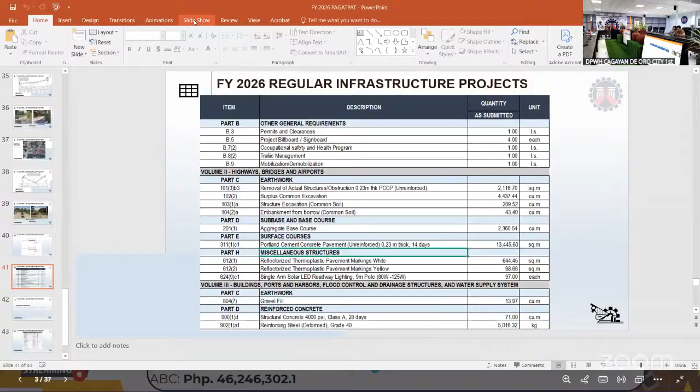So I'll continue. Gravel fill, 13.97 cubic meter. Structural concrete, 4,000 PSI, class A, 28 days, 71 cubic meter. Reinforcing steel deformed, grade 40, 5,016.32 kilogram. And in permits and clearances, you have the excavation permit as per ordinance.

So this is the minimum equipment requirement to be used. Two-way radio, 2 owned, barricade flasher, 10 owned, trailer for equipments, 1 leased, concrete vibrator, 2 owned, concrete screeder, 1 owned.

Concrete saw, 1 owned, mechanized joint sealer, 1 owned, plate compactor, 1 leased, vibrator roller, 1 leased, motorized road grader, 1 leased, dump truck, 2 leased, transit mixer, 1 leased, concrete batch plant, 1 leased, chainsaw, 1 leased, boom truck.

1 leased, backhoe, pavement breaker, 1 leased, water truck, pump all models, 1 leased, bulldozer, 1 leased, payloader, 1 leased, backhoe, 1 leased, bar cutter, single phase, 1 owned, bar bender, 3 phase, 1 owned, 1 bagger mixer, 1 owned.

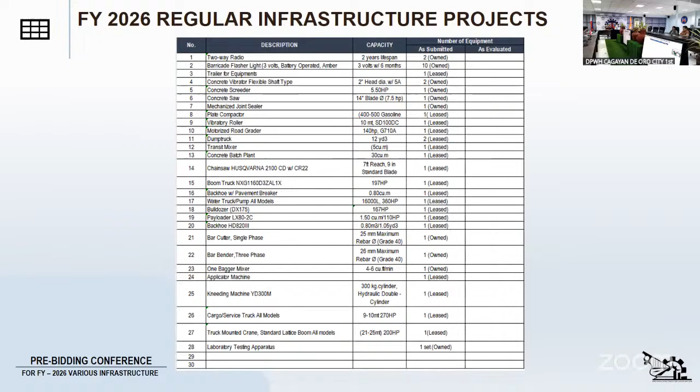And that's all for this project. Thank you. Any question?

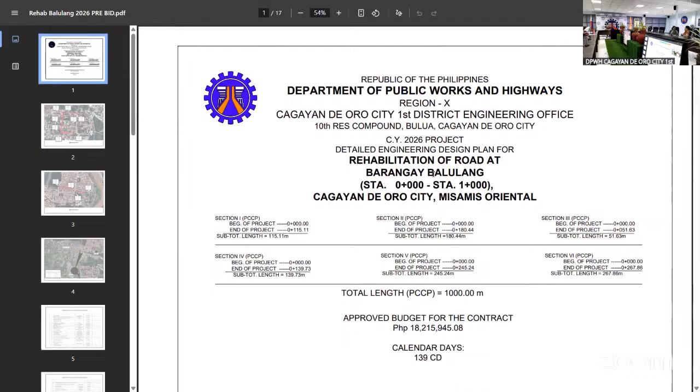Hello, good afternoon, for rehabilitation of road at Barangay Balulang, Station 0 to Station 1000, Cagayan de Oro City, Misamis Oriental with calendar days of 139 and approved budget for contract of 18,215,945.08. This project has a total length of 1,000 meters, divided into 6 sections.

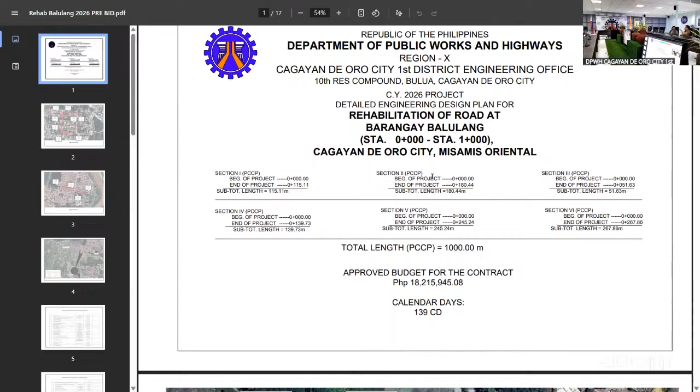Section 1 with 115.11 meters, Section 2 of 180.44, Section 3 51.63, Section 4 139.73, Section 5 245.24, and Section 6 with 267.86.

As shown here are Sections 1, 2, 3, and 4 presented by the red line. Section 1 here at Nangka Street, Section 2 at the 10th Street, Section 3 at 2nd Street, and 9th Street for Section 4.

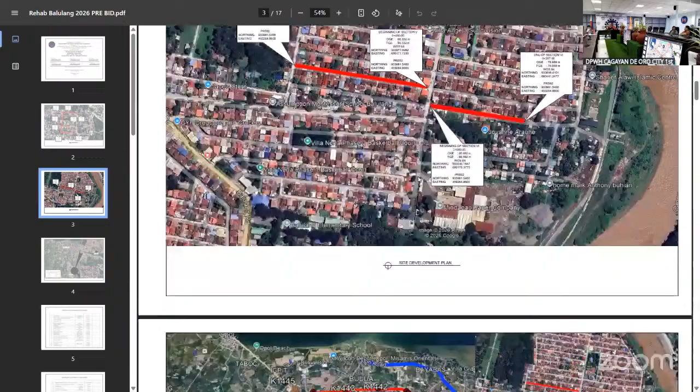And for Section 5 and 6, as shown here, on the left side is Section 5 and Section 6 on the right side. Here's the general area of the 2 divided locations for Section 1 to 4 and Section 5 to 6, shown here.

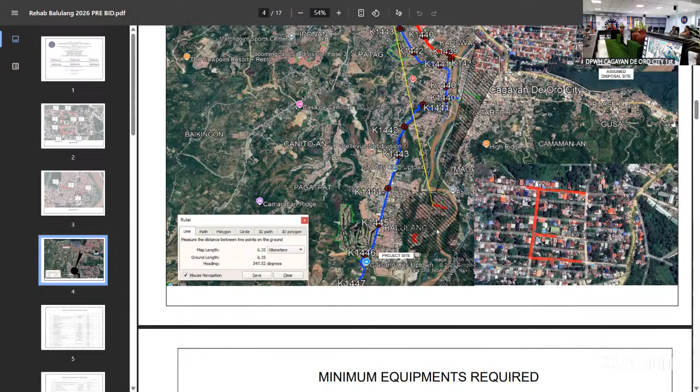For the minimum equipment required for the project: 2-way radio, 3 owned; barricade flasher light, 10 owned; trailer for equipment, 1 lease; trailer for minor tools, 1 lease; backhoe with pavement breaker, 1 lease; payloader, 2 lease; dump truck, 2 lease; concrete saw, 1 lease; bulldozer, 1 lease; backhoe, 1 lease; motorized road grader, 1 lease; vibratory roller, 1 lease.

Water truck/pump, 1 lease; concrete vibrator, 2 owned; concrete screeder, 1 owned; bar cutter, 1 owned; mechanized joint sealer, 1 lease; transit mixer, 4 lease; concrete batch plant, 1 lease.

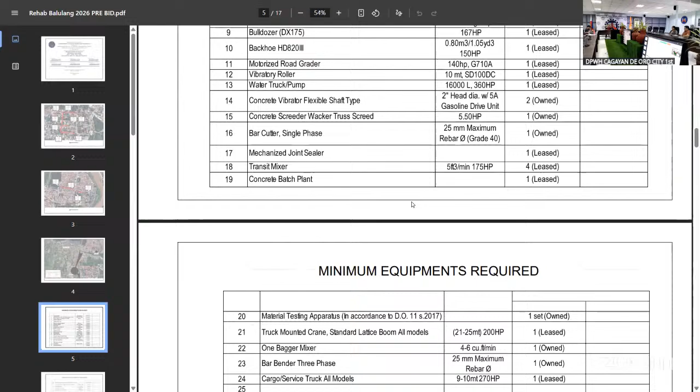Material testing apparatus in accordance with D.O. 11 series of 2017, one set owned. Truck mounted crane, standard lattice boom, all models, one lease. One bagger mixer, one owned. Bar bender, one owned. And cargo/service truck, all models, one lease.

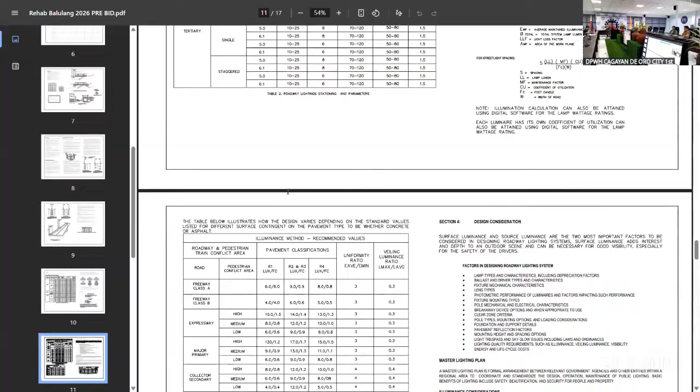Oh, shucks. Hmm. Okay. Follow mo lang. Hindi, ito, Excel mo. Itong sa marami mo dali. Wala ito. Hirap na pa rin plan, di ba? Nagkataon ako pa rin. Second.

Continue, sorry for the technical difficulties. Let's skip on to the typical roadway sections for the project. I'm gonna show the summary of quantities after this.

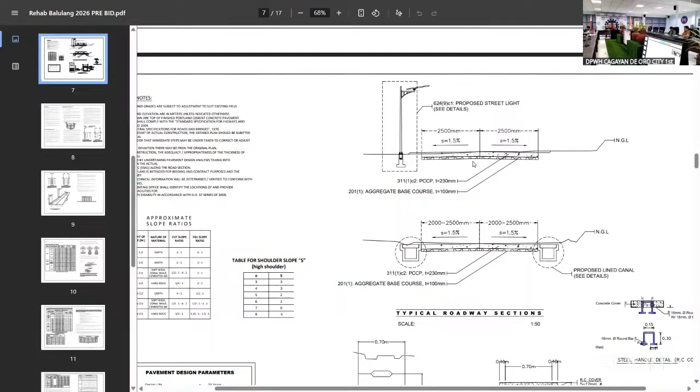For the typical roadway sections for the project, we have proposed street light. For the PCCP, we have 230 mm thickness, and the width on one of the sections is 2,500 mm per lane, or 2.5 meters. For the other typical roadway sections, depending on the section, it ranges from 2 meters to 2.5 meters per lane. We have proposed line canal, and here are the details for that. And here are the typical street lighting details.

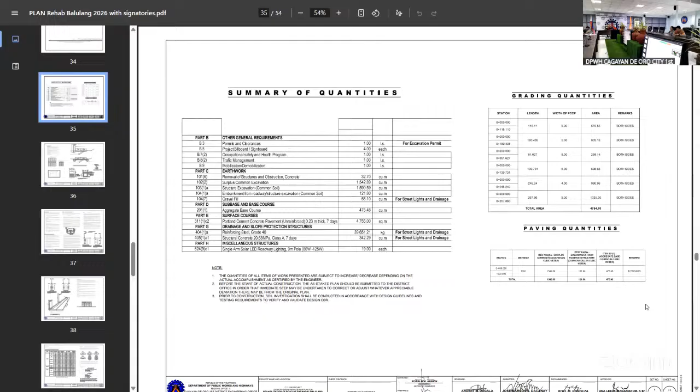So now let's proceed to project number 5, rehabilitation of road at Barangay Canitoan, Station 0 plus 000 to Station 2 plus 000, Cagayan de Oro City, Misamis Oriental. The details of this project will be discussed again by the General Manager, Marks.

Good afternoon again. For rehabilitation of road at Barangay Canitoan, with approved budget for the contract of 36,998,409.31 and calendar days of 350. For this project, we have 3 sections with a total length of 2,000 meters.

Section 1 with 1,916.75 meters, and for section 3, we have 83.25 meters for PCCP, with a total of 2,000 meters. Other than section 2 for the drainage, which is 360 meters.

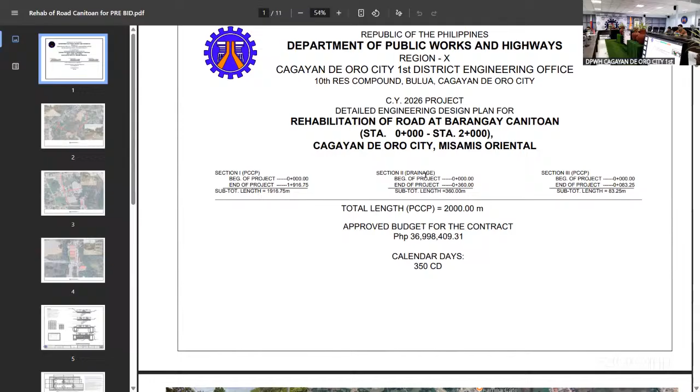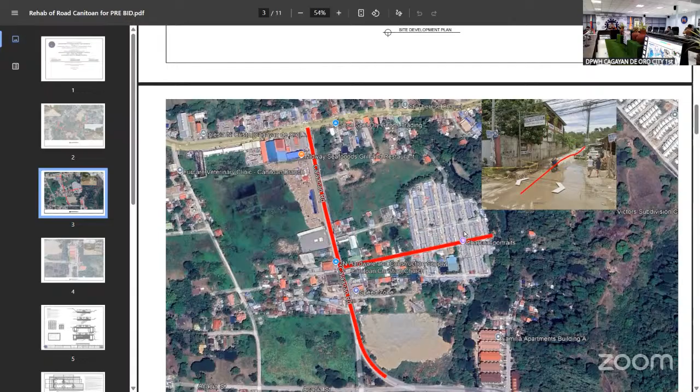So for this project shown here at Canitoan, represented by the red line along this alignment, is the rehabilitation for the road for Canitoan. Also representing the red line is where the drainage will be placed, which I've mentioned before, which is 360 meters. And for the other section for the PCCP, represented by the green line, near the Familia Apartments Building.

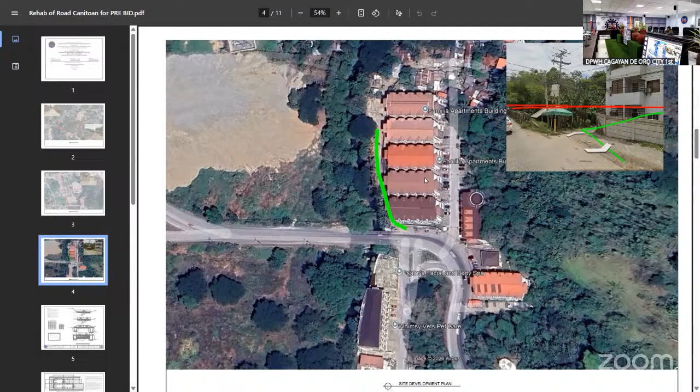And here are the typical roadway sections for our project. For the rehabilitation of the roadway section, the road has an existing 2.5 to 3.05 meters per lane. The new lane or new width after rehab is 3.05 meters. So the new PCCP that's gonna be put there is 280 mm thick, and the base course is 200 mm thick, same. Also shown here is the proposed manhole and the proposed drain line canal.

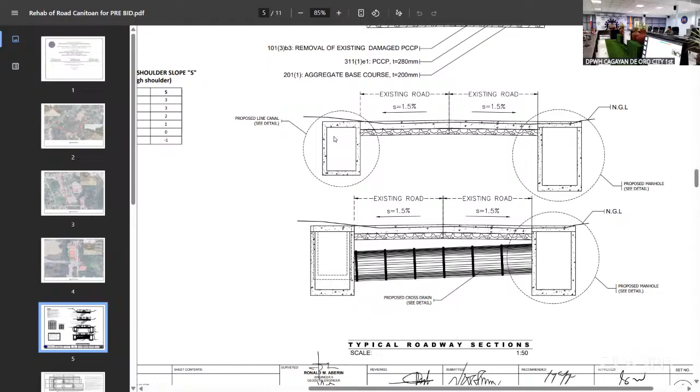And a typical plan for the reblocking or the rehab. The typical drainage details. Typical manhole details.

And here are the summary of quantities. We have permits and clearances, one lump sum, project billboard four each. Occupational safety and health program, 1 lump sum. Traffic management, 1 lump sum. Mobilizations, that's the mobilization, 1 lump sum.

Removal of existing structures and obstruction, 0.23 meters thick, PCCP unreinforced, with a quantity of 8,625 square meters. For surplus common excavation, with a quantity of 2,980.87 cubic meters.

For structure excavation, common soil, we have a quantity of 1,494 cubic meters. And for embankment from roadway and structure excavation, common soil, we have a quantity of 239.24 cubic meters. And gravel fill, with a quantity of 46.80 cubic meters.

And for the subbase and base courses, for 201(1) aggregate base course, we have a quantity of 2,104.5 cubic meters. For surface courses, we have Portland cement concrete pavement reinforced 0.28 meters thick, 14 days, with a quantity of 10,522.5 square meters. And for our drainage and slope protection structures, here are the items and quantities for drainage.

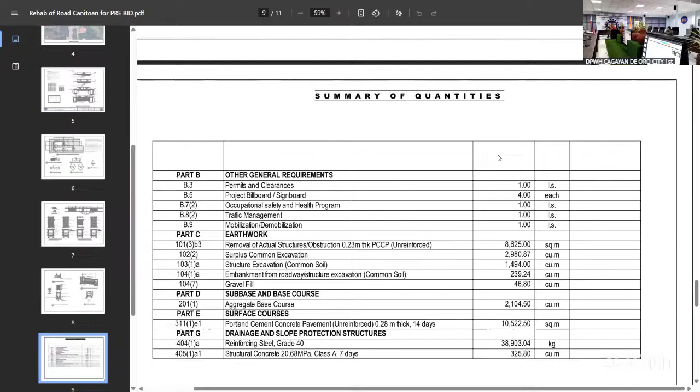And here are the minimum equipments required for the project: two-way radio, 3 units, barricade flasher light, 10 units, trailer for equipments, 1 lease, trailer for minor tools, 1 lease, backhoe with pavement breaker, 1 lease, payloader, 2 lease, dump truck, 2 lease, concrete saw, 1 unit, bulldozer, 1 lease, backhoe, 1 unit, motorized road grader, 1 lease.

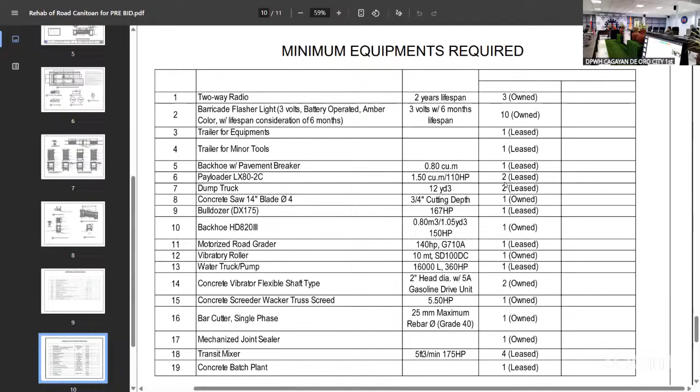Vibratory roller, 1 unit, water truck/pump, 1 lease, concrete vibrator, 2 units, concrete screeder, 1 unit, bar cutter, 1 unit, mechanized joint sealer, 1 unit, transit mixer, 4 lease, concrete batch plant, 1 lease.

Cargo/service truck all models, 1 lease, truck mounted crane, standard lattice boom all models, 1 lease, 1 bagger mixer, 1 own, bar bender, 3-phase, 1 own, and cargo truck for 9 to 10 metric tons, 1 lease.

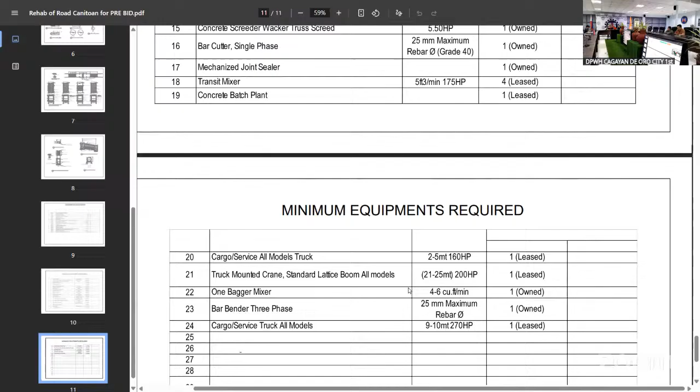And that's all for Rehabilitation Road at Barangay Canitoan. Any questions?

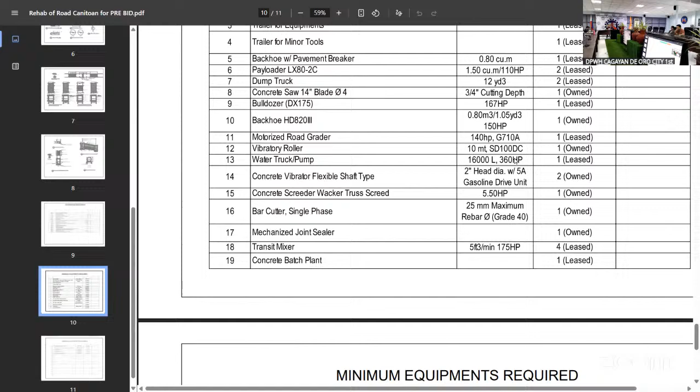So now let's proceed for the sixth project. Rehabilitation of road at Barangay Iponan, Station 0+002 to Station 1+100, Cagayan de Oro City, Misamis Oriental.

Details on the project will be discussed by Engineer Andre.

Good afternoon, everyone. I will present the rehabilitation of road at Barangay Iponan, Station 0 to Station 1500, Cagayan de Oro City, Misamis Oriental.

We have the appropriation of 28,315,000 with the ABC of 27,748,201.33 pesos, with a total project duration of 286 calendar days.

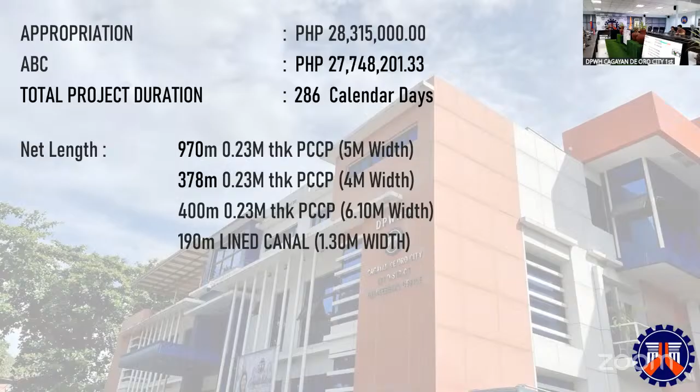For the scope of works, we have a 970 meter, 0.23 thick PCCP, 5 meter width, a 378 meter, 0.23 meter thick PCCP, 4 meter width, a 400 meter, 0.23 thick PCCP, 6.1 meter width, and a 190 meter lined canal with a width of 1.3 meter, and 20 sets of solar street lights, subject for bid bulletin.

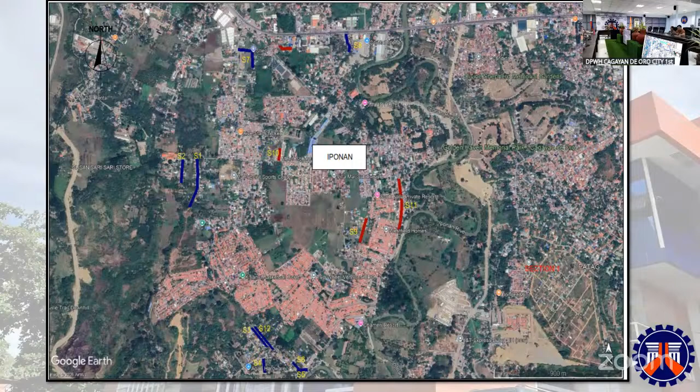For the location of our projects, along the Barangay Iponan area, we have 12 sections indicated here by the blue and red lines.

We have section 1, 2. We have many different sections in this Barangay Iponan area, as indicated here.

For our section 1 at Iponan Balaos, 5-meter width with 332-meter length. And also section 2, zone 7 Balaos with a 4-meter width, 159-meter length.

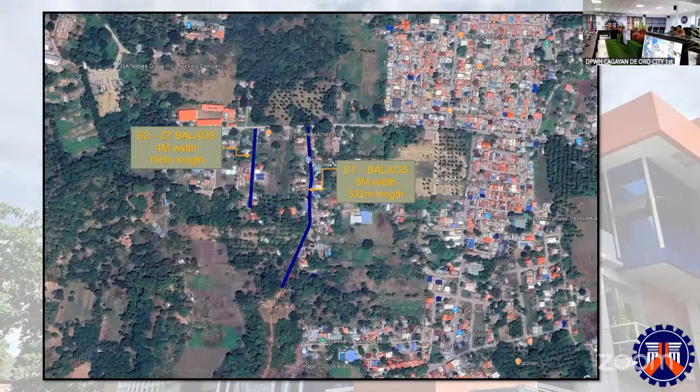For section 1, this is the location for section 1, start and end. For section 2, at the beginning and also the end.

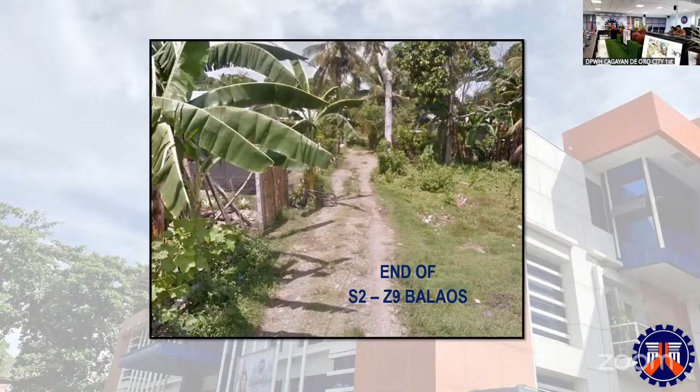Here indicated the section 3 road at Bulao with a 5-meter width and a 69-meter length. Also, this section 12 Bulao 2, which is 5-meter width, 205-meter length.

Section 4 Bulao 3, 5-meter width with the length of 93.5 meters. Section 5, 5-meter width, 40-meter length. And lastly, the section 6, 5-meter width, 70-meter length.

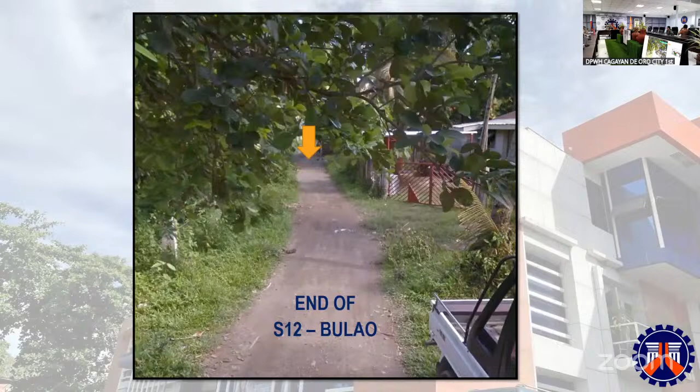So the start of section 3 after the existing PCCP and the end of section 3. Start of our section 12 and end of our section 12. Start of our section 4 and start of our section 5.

So section 4 and section 5 are intersecting. The end of our section 5. The start of our section 6 Bulao and end of our section 6.

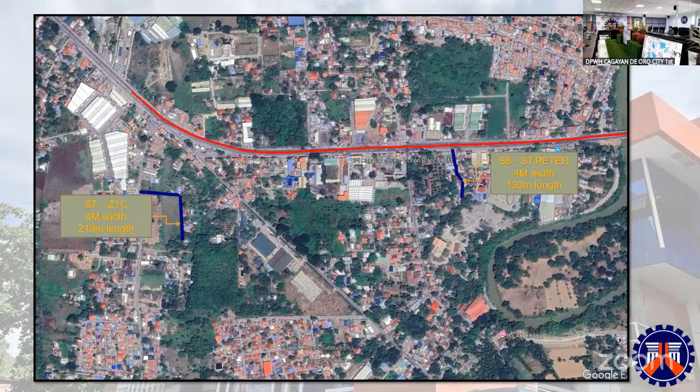We have here section 7 at zone 1C with a width of 4 meters and length of 219 meters. And section 8 near Saint Peter Road, beside the left side of Saint Peter. Right side beside Saint Peter Road, 4-meter width and 130-meter length.

For the start of section 7, and the end of section 7, or section 8, so this existing gravel road.

For our section 9, behind Westfield, we have a 5-meter width, 170-meter length. And also section 11, a reblocking with a 6.10-meter width, 400-meter length. So this is...

There will be changes in the bid bulletin, so I will update the plans. For section 9 behind the Westfield, we will connect this Barangay Road to the other side.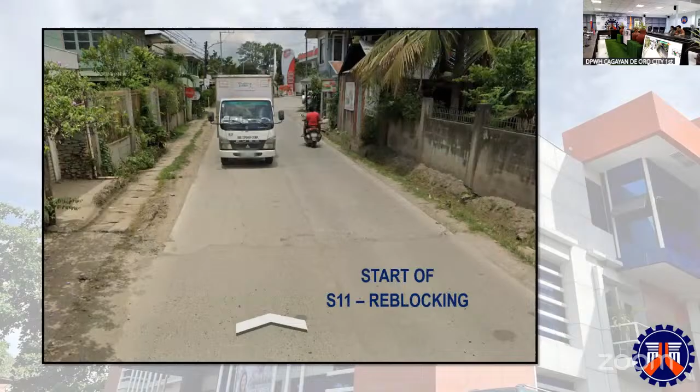And also start of our reblocking of section 11, and then reblocking of section 11 along the main road in Centro Iponan. Lastly, section 10 near the MGCI with a 5-meter width and 70-meter length.

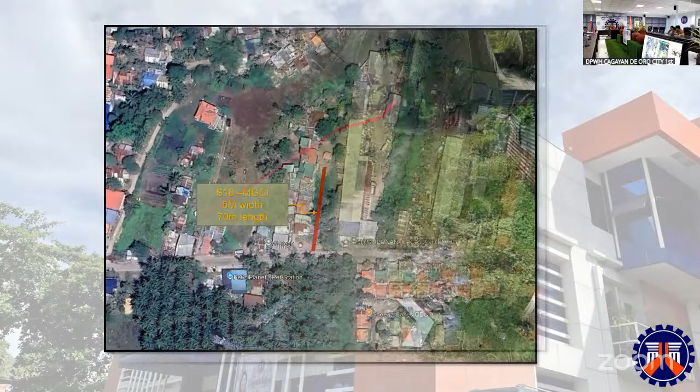All in all, we have 12 sections. For the typical sections of our project, we have a typical section of 5-meter width.

Indicated here the stations. So we have the embankment from roadway, structure excavation, common soil, the Portland cement concrete pavement unreinforced 0.23 meter thick, 14 days PCCP, and also the aggregate base course of 0.15 thickness and surplus common excavation.

For typical road section with lined canal, it is located in section 1. We have a structure excavation for the line canal, a structural concrete class A, 27.58 megapascal, 28 days, a reinforcing steel grade 40.

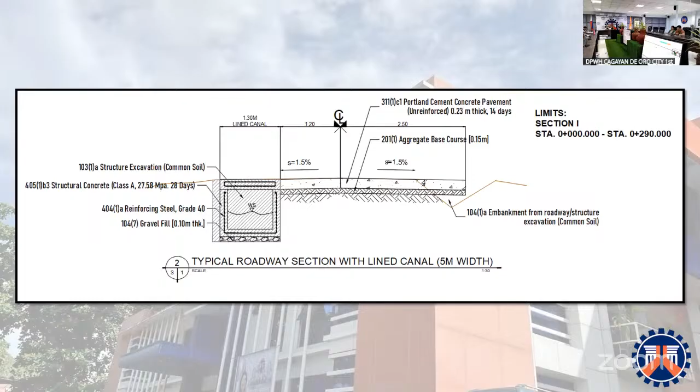And a gravel fill 0.10 thick, indicated in the typical section.

Here, the typical section, roadway section for a 4-meter width road, indicated the limits here on the right and the left side, same as the 5-meter width pay items.

And also typical roadway section, 5-meter width with solar street lights. We have the single arm solar LED roadway lighting, 9-meter tall pole with 80 watts to 125 watts.

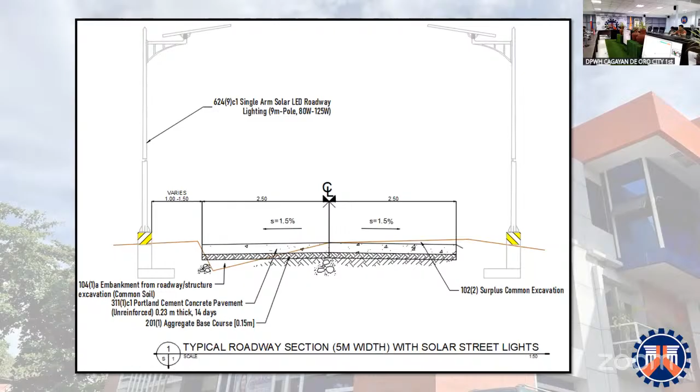And also a typical roadway section for our reblocking. We have the plan view of our line canal and also the details, the reinforcement details and the thickness.

We have a top cover of 0.20 meter thick, and a 1.3 meter total width of our line canal. Indicated here also the steel plate cover in between.

There'll be steel plate cover every 10 meters. For minimum equipment requirements, we have the trailer for equipments.

One leased concrete vibrator, 2 owned concrete screeder, 1 owned mechanized joint sealer machine, 1 owned plate compactor, 1 owned vibratory roller, 1 leased motorized road grader, 1 leased dump truck, all models, 2 leased backhoe, 1 leased backhoe with pavement breaker, 1 leased bulldozer, 1 leased payloader, 1 leased water truck/pump, 1 leased cargo truck.

With a 9 to 10 metric tons capacity, 1 leased bar cutter with a 25 mm maximum rebar, 1 owned, and also a bar bender, 25 mm maximum rebar, 1 owned, 1 bagger mixer, 1 owned concrete saw for our PCCP, 1 owned, a 2-way radio with lifespan of consideration of 2 years, 2 owned for the traffic management.

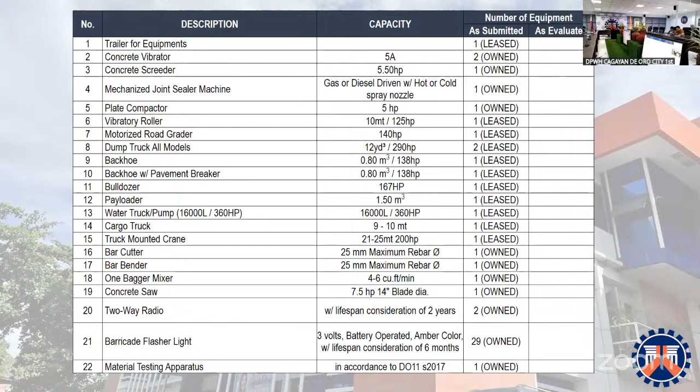For the summary of our quantities, we have the provision for the field office engineer, 9.53 months, rental basis, the project billboard signboard for each occupational safety and health program, 1 lump sum, traffic management, 1 lump sum, mobilization/demobilization, 1 lump sum.

For earthworks, we have a removal of actual structure/obstruction, 0.23 meter thick, CCP reinforced, with a quantity of 3,355 square meters. Surplus common excavation,

2,662 cubic meters. A structure excavation common soil of 31.68 cubic meters for the line canal and also the street lights. Embankment from roadway/structure excavation common soil with the quantity of 1,408.50 cubic meters.

Gravel fill, 2.88 cubic meters. Subgrade preparation common material, we have 10,157 square meters. For subbase and base course, the aggregate base course of 1,760 cubic meters.

For surface courses, we have the Portland cement concrete pavement unreinforced, 0.23 meter thick, 14 days, with a quantity of 11,735 square meters. For our reinforcing steel, grade 40, the quantity of

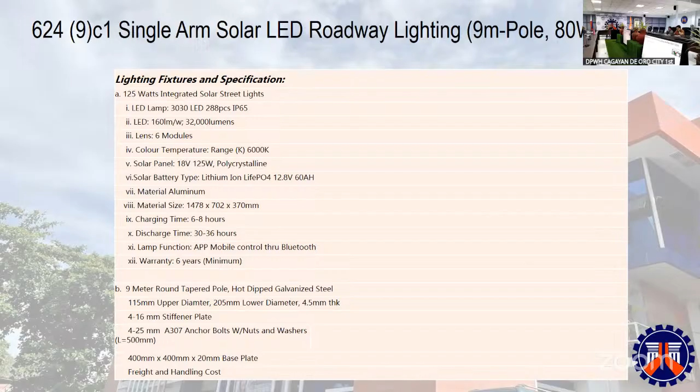So thank you. So the project's more on concreting of existing gravel roads and few reblockings and 190-meter line canal and 20 sets of solar street lights. So that's all for the rehabilitation of Barangay Road at Barangay Iponan.

Is there any questions or clarifications from our observers or our visitors? Is that from our viewers? So there's no questions regarding the details of this project.

So now let's proceed with our last project: construction, completion of multi-purpose building, Barangay Center, Barangay Pagatpat, Cagayan de Oro City, Misamis Oriental. The coordinates of 124.58319 degrees and 8.45902 degrees. The details of this project will be discussed by Engineer Major Castillo.

Good afternoon, everyone. I'll be representing the project named Construction Completion of Multi-Purpose Building, Barangay Center, Barangay Pagatpat, Cagayan de Oro City, Misamis Oriental, with the coordinates of 124.58319 and 8.45902, with a contract ID of 26KH0063.

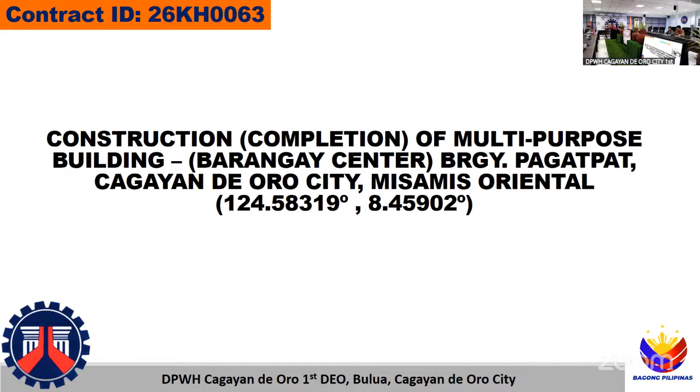So the appropriation of this project is 3 million with an approved budget for contract of 2,969,905.11 centavo, with a calendar days of 100, and its major categories are BICWOPLC, buildings construction without piles, low-rise concrete frame, and for the similar major category is BICWOPHC, buildings construction without piles, high-rise concrete frame.

So mostly the scope of work of this project is the construction of the extended 2 bays of the existing covered court with electrical works and elevation of the existing basketball court concrete slab with painting lines.

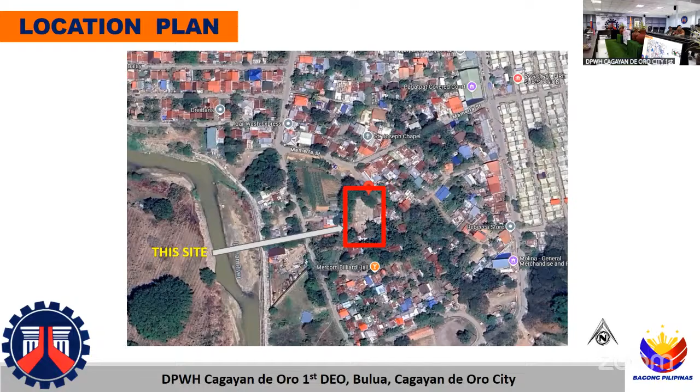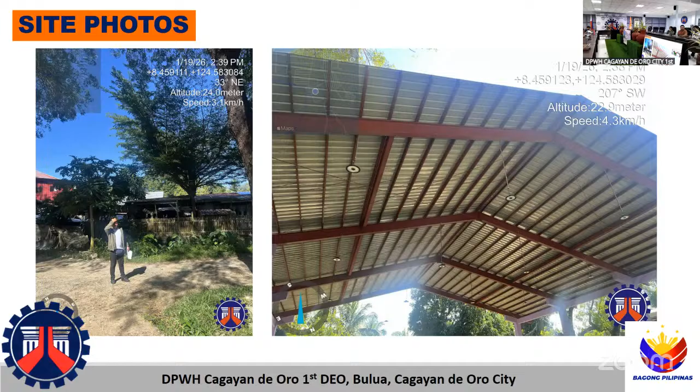So this is the location plan. The area is along Mamerta Street, near the Farmer Center and Materials Recovery Facility. This is the location plan and the site photos. As you can see, we already have existing structures, mainly the covered court and a little bit damaged concrete slab to be layered, with also existing electrical fixtures.

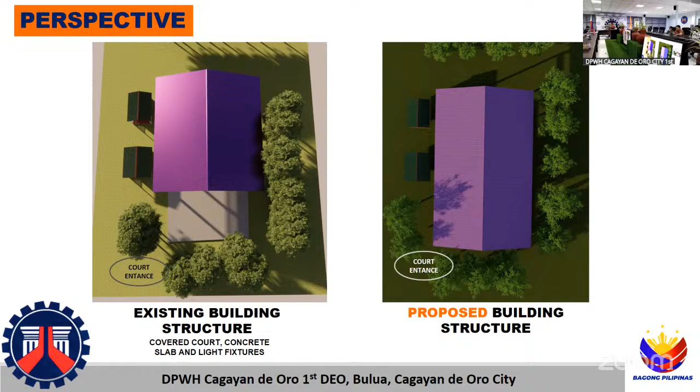So the perspective of this project: on the left side is the existing building with the covered court concrete slab and the light fixtures, while on the right side is the proposed building structure. So instead of just 3 bays from the existing, we will have 5 bays in total due to the additional 2 bays and the layered concrete slab.

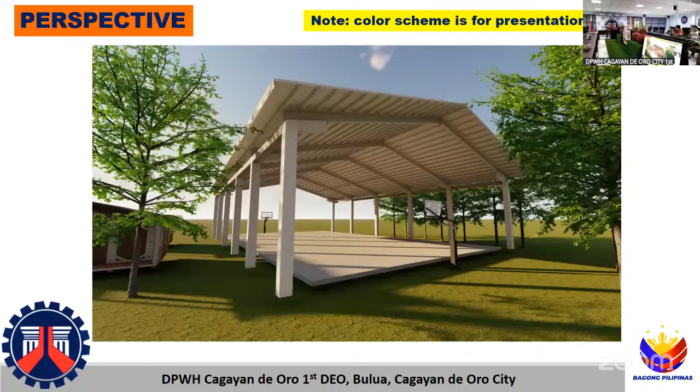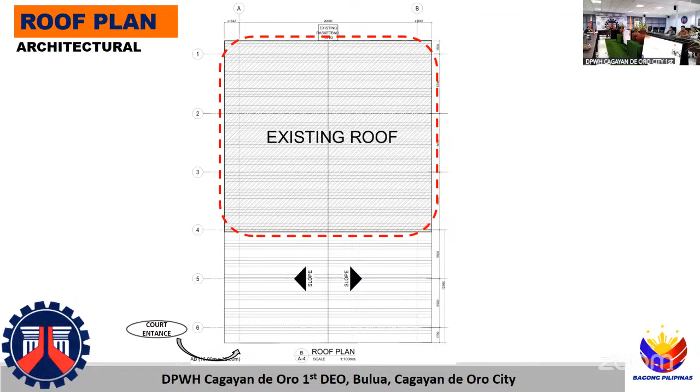So for the floor plan, for the architectural, we have the ground floor plan and the roof plan, which also is a dual slope, just like the existing roof. And the elevations: front, rear, left side, and right side elevations. We also have the sections, such as the cross sections and the longitudinal sections.

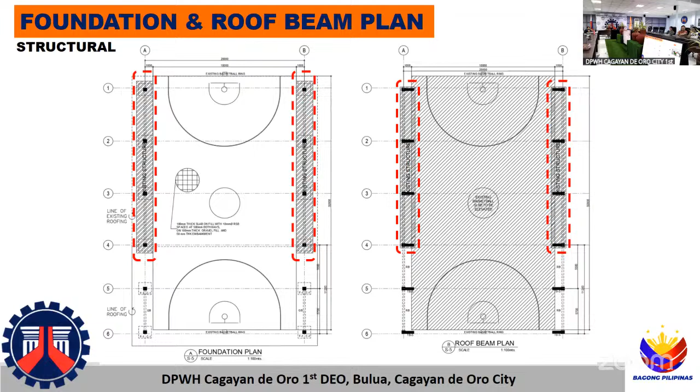For the structural part, we have the foundation plan, roof beam plan, and the roof framing plan. Also with a structural cross-section and structural longitudinal sections.

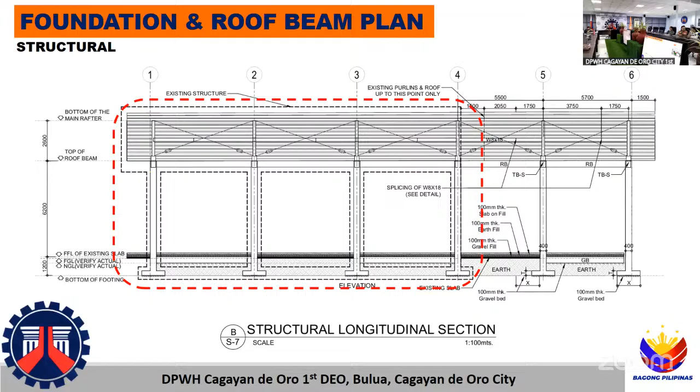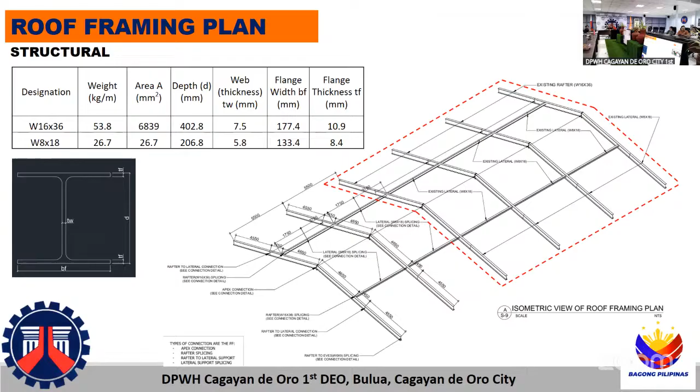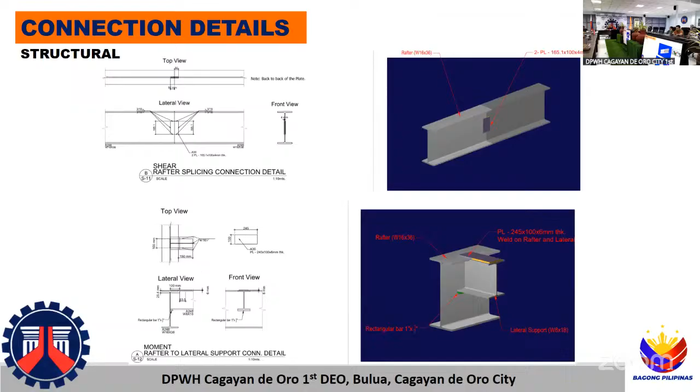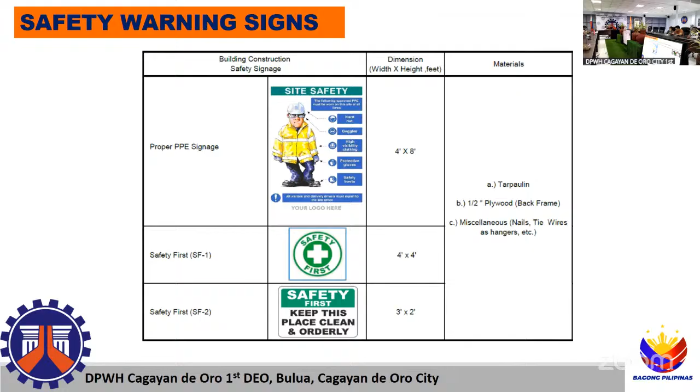Now for the safety warning signs, we have the proper PPE signage, safety first SF1, and safety first SF2. Hard hat area, danger deep excavation, beware falling debris, construction entrance, construction exit, safety harness required, welding hot work area, authorized personnel only, fall hazard, temporary material stacking area.

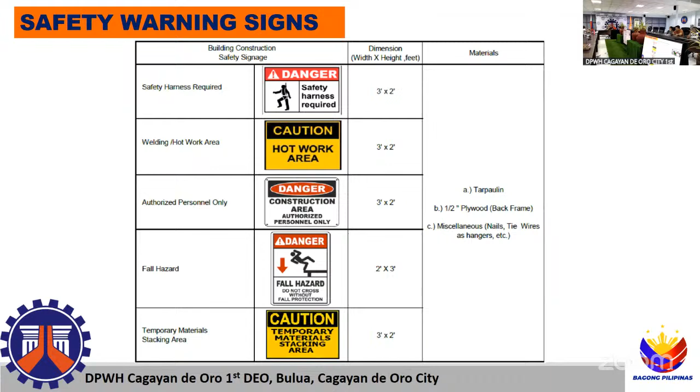903-2, formworks and false works, 122.85 square meter. And for Part E, finishing and other works, other civil works, 1013-2A, fabricated metal roofing accessory, 17.08 linear meter. 1014-1B2, pre-painted metal sheets above 0.427 millimeter, rib type long span, 296.33 square meter.

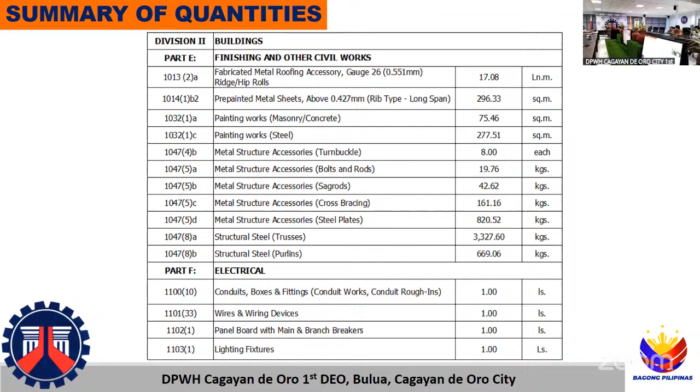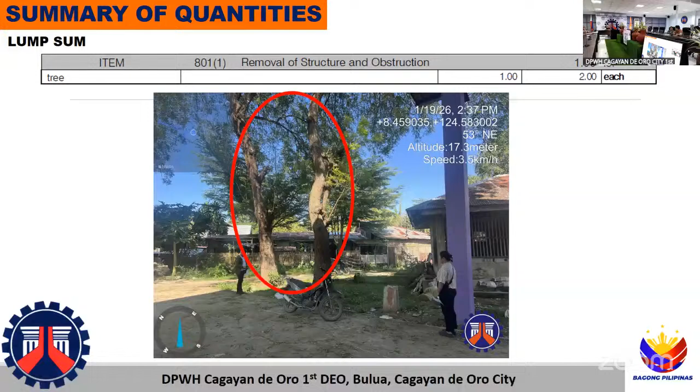And for the lump sum in our summary of quantities, we have the removal of structure and obstruction, item 801(1), 2 each. The circled red marks are the 2 trees to be removed. And this is for our electrical: conduit boxes and fittings, wires and wiring devices, panel board, and lighting fixtures.

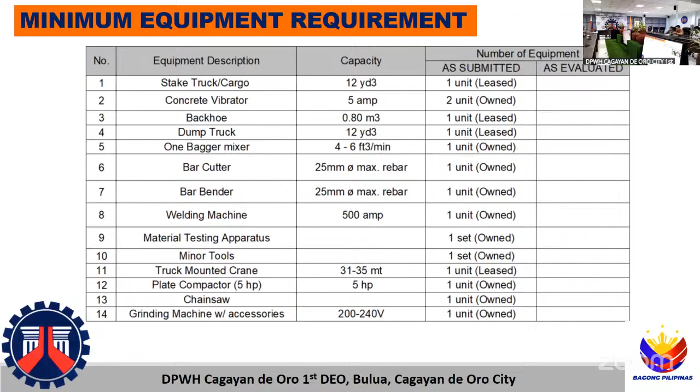And for our minimum equipment requirement, we have stake truck cargo, 1 unit leased, concrete vibrator, 2 units owned, backhoe, 1 unit leased, dump truck, 1 unit leased, 1 bagger mixer, 1 unit owned, bar cutter, 1 unit owned, bar bender, 1 unit owned, welding machine, 1 unit owned, material testing apparatus, 1 set owned, minor tools, 1 set owned, truck mounted crane, 1 unit leased, plate compactor, 1 unit owned, chainsaw, 1 unit owned, grinding machine with accessories, 1 unit owned. That is all for the Barangay Pagatpat.

So, any questions and clarifications?

Just want to familiarize about the term. This slab on the cement flooring. Layered. Yes, layered of sand/gravel before.

Thank you. So, is there anything else, clarifications?

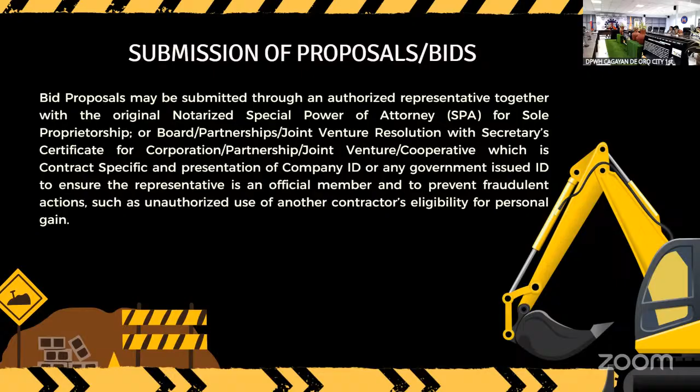During the submission of proposal or bids, it may be submitted through an authorized representative together with the original notarized special power of attorney for sole proprietor, or for partnership, joint venture resolution with secretary's certificate for corporation, partnership, joint venture, or cooperative, which is contract specific, and a presentation of a company ID or any government issued ID should be presented.

So we have here the first envelope: the eligibility, technical, and financial requirements. Those are enclosed in our first envelope. For the first requirement, it should have a valid PhilGEPS registration certificate, including all pages. This is for platinum membership.

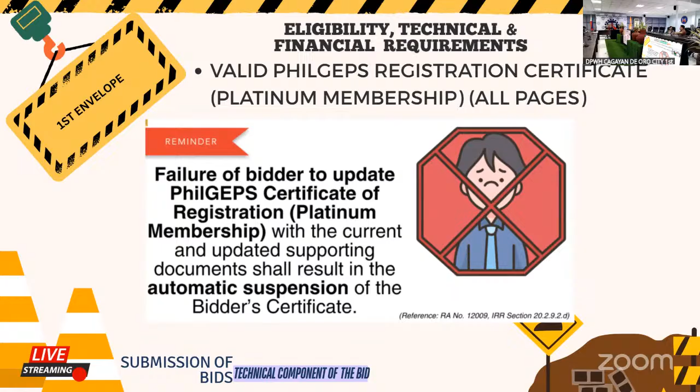Another requirement is the statement of the prospective bidders' ongoing government and private contracts, including contracts awarded but not yet started. We emphasize here that failure to disclose the required information or providing incomplete or false details may result in disqualification from the bidding process. So all ongoing contracts should be stipulated in this particular requirement.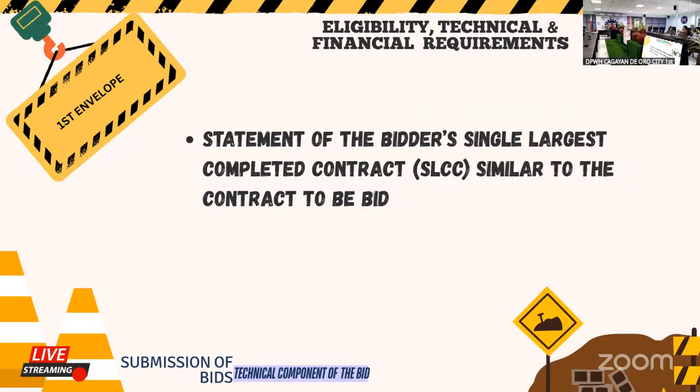We also have here the statement of the bidder's single largest completed contract, similar to the contract to be bid. So for the PCAB, or the Philippine Contractors Accreditation Board license, or for joint ventures, the special PCAB license.

Then we also have here the bid security in the prescribed form. So we have 4 forms, as shown here, with the amount of bid security.

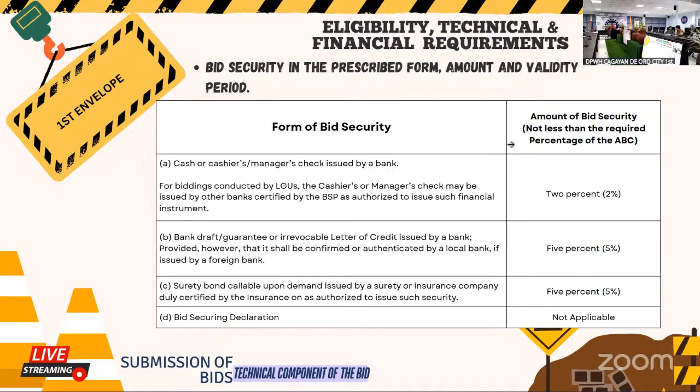As for the bid securing declaration, we have a standard form. So this is the standard form of the bid securing declaration, or the BSD.

So we have here the project requirements. This is the form for the organizational chart for the contract to be bid.

We also have here the list of contractors' key personnel to be assigned to the contract to be bid, with their complete qualification and experience data. So the list of contractors' major construction and laboratory equipment units, which are owned, leased, and or under purchase agreements, supported by proof of ownership or certification of availability of equipment from the equipment lessor or vendor, for the duration of the project. So for the list of contractors' major construction and laboratory equipment, we have a standard form for this one.

Then we would like to remind all prospective bidders to kindly fill up all the required information. So we also have here the requirement, the ISO 9001:2015.

This is a certification for medium A contractors for projects with an approved budget for the contract range. So since we have 2 projects with an ABC of 46 million...

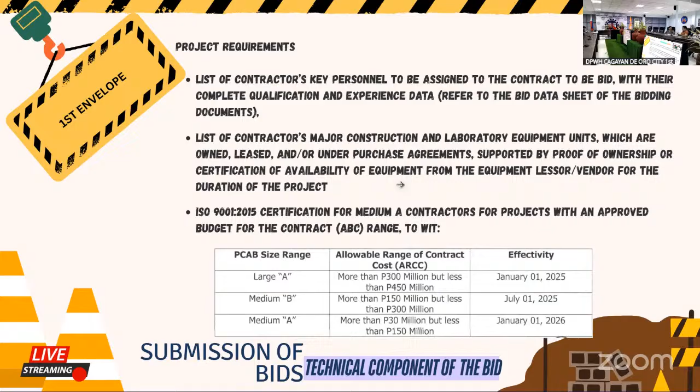So this is the form, the standard form for the list of contractors' key personnel.

But we would also like to reiterate that they should also attach the curriculum vitae and affidavits of commitment to work on the contract for the pledged personnel.

So for the list of contractors' major equipment, as mentioned earlier, we would like to emphasize here that all this information should be filled up.

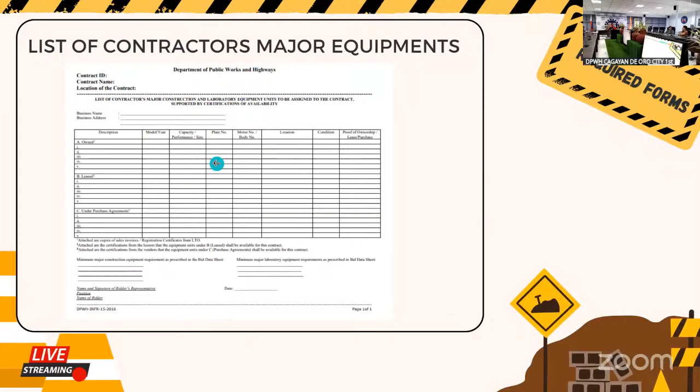So we also have here the original duly signed omnibus sworn statement, the prospective bidders' computation of net financial contracting capacity. So for joint ventures, the joint venture agreement.

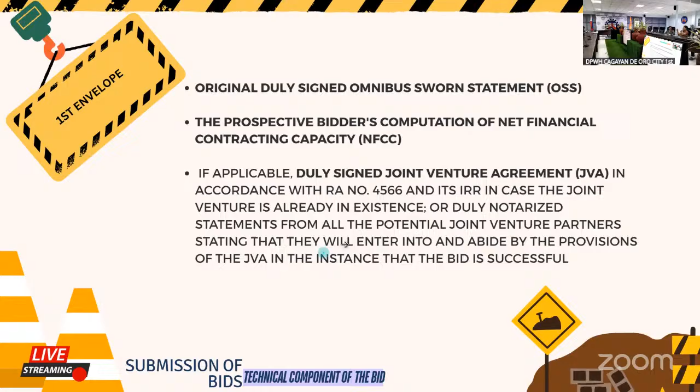So we have here the standard form for the omnibus sworn statement.

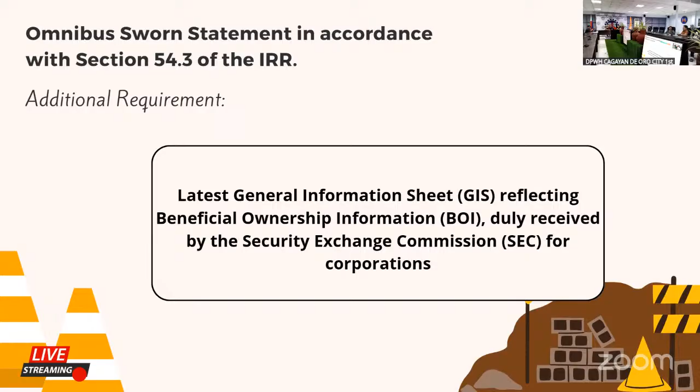So an additional requirement for corporations, the latest general information sheet reflecting beneficial ownership information, which is duly received by the Security Exchange Commission, should also be attached.

So for our second envelope, we have the financial requirement. So we have 4 forms: the financial bid form, the bill of quantities, the detailed estimates, and the cash flow by quarter.

So we have here the forms. This is the bid form, the bill of quantities, the detailed estimates, or this one is the summary of bids, and the cash flow by quarter.

So these are the common grounds for a non-compliant bid. Among the observations during our previous procurement activities, we have the missing or incomplete required documents, unsigned or improperly signed forms, incorrect or inconsistent computations in the bill of quantities or the financial proposal, expired or invalid licenses and permits, non-compliance with specified technical requirements, and failure to use the prescribed forms.

So as a preventive measure and recommendations, prospective bidders should carefully check the validity of all its documents, ensuring all forms are signed by the authorized signatory, using the exact forms provided in the bidding documents, verifying computations before submission, organizing documents according to the prescribed sequence, and asking clarifications from the Bids and Awards Committee Secretariat within the allowable period.

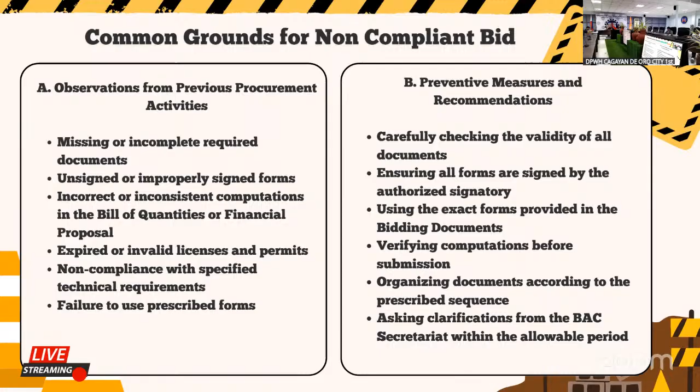So the requirement, in addition, we also have here the DEO 110 series of 2024. So as mentioned earlier, the implementation of the ISO 9001:2015, for ABCs 30 million and above, you are required.

So this is the basis for medium A contractors. So I believe that would be all, Mr. Vice. Thank you and good afternoon.